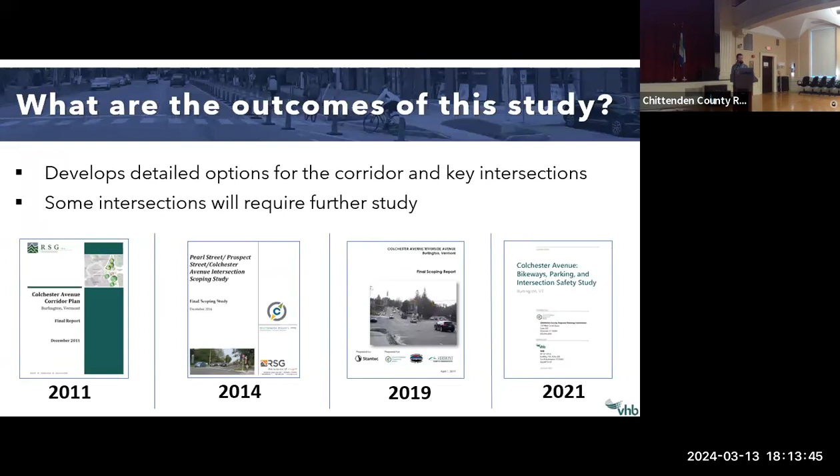So the outcome of this is a finalized document with a recommendation. That finalized document will contain the preferred alternative, which will be planned and designed similar to the degree that you're seeing on the roll plans in the back. These are conceptual in nature. They are intended to eventually inform engineering design, potentially be used to apply for additional funding, what have you.

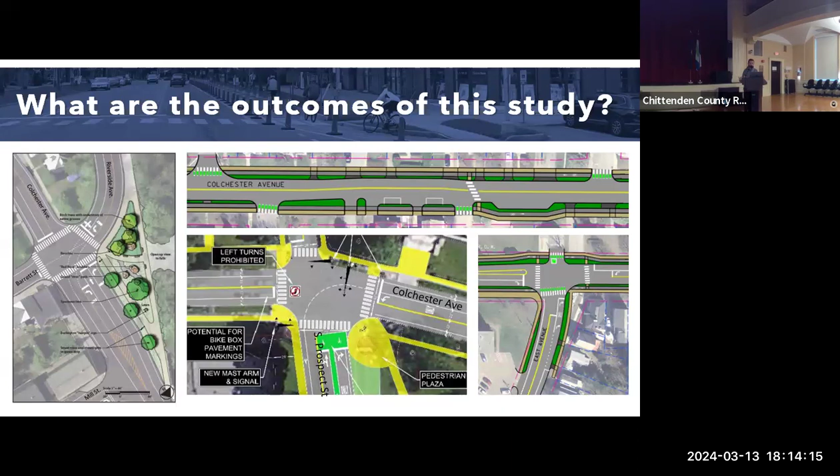So what comes out of this is not only a selected alternative for the corridor of the city, but also a stepping stone into the next phase of the project.

So as a quick reminder, we're looking at Battery Street between Maple Street and Sherman Street, abutting and intersecting College Street, Main Street, Cherry Street, a lot of roadways where we know there's a ton of people movement on foot, on bike, by car, connecting at the south end to Maple Street and the future rail yard enterprise project, and then eventually connecting at Main Street with the new Great Street project, which, as you've seen right outside, is currently under construction, and then traveling north to Battery Park and Sherman Street.

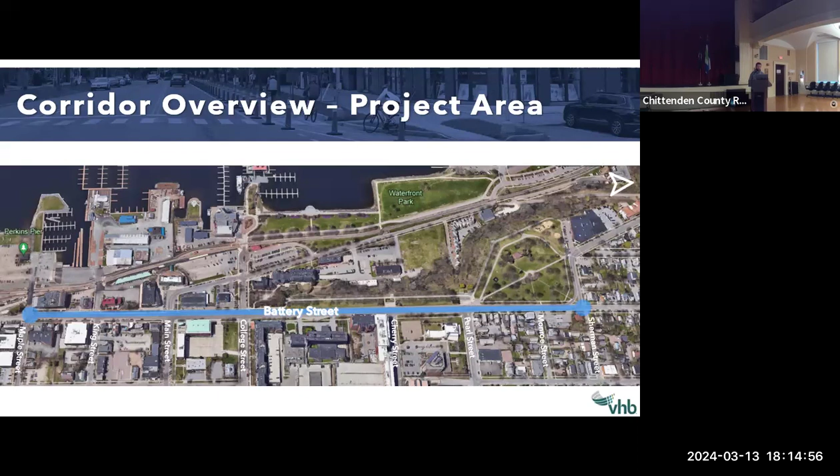So the first time we all engaged was in this room, and that was at our local concerns meeting last spring. From that, we gathered a ton of input about driving along Battery Street, about bicycling along Battery Street, about walking along Battery Street, about traveling across Battery Street between the downtown and the waterfront, about commuting from the north end to the south end in South Burlington, about all manner of things on Battery Street.

And several things kind of were brought forward, and the key takeaways that almost resonated across the board was Battery Street's very uncomfortable. It doesn't feel safe. The crash data that we looked at for motor vehicles would reflect that, and there was definitely consensus that we need corridor safety improvements from the top of Battery Street to the bottom of Battery Street.

Beyond that, we need enhanced pedestrian accommodations. It's almost acts at times like a barrier between the downtown and the waterfront. So better facilitating walking and bicycling connections across Battery Street in addition to along it. Dedicated bicycle facilities - for those that travel Battery Street regularly, you know that there is one single bike lane on one side of the road, and that is in the northernmost couple of blocks. There are otherwise no bicycle facilities on Battery Street to facilitate that active mode of transportation.

We also heard desires for better community connectivity, getting at not just the downtown district connecting to the waterfront district, but neighborhoods in the King Street area connecting to neighborhoods in the north end and vice versa. And then just streetscape improvements - we heard a lot of people like the energy that's around Main Street and the improvements being done there, the improvements previously done along St. Paul Street, and they would like to see that happen along Battery Street as well. Better street ecology, better, more tree planting, more green space, more ways to engage with the street, have it tell a story about the city, about the street itself.

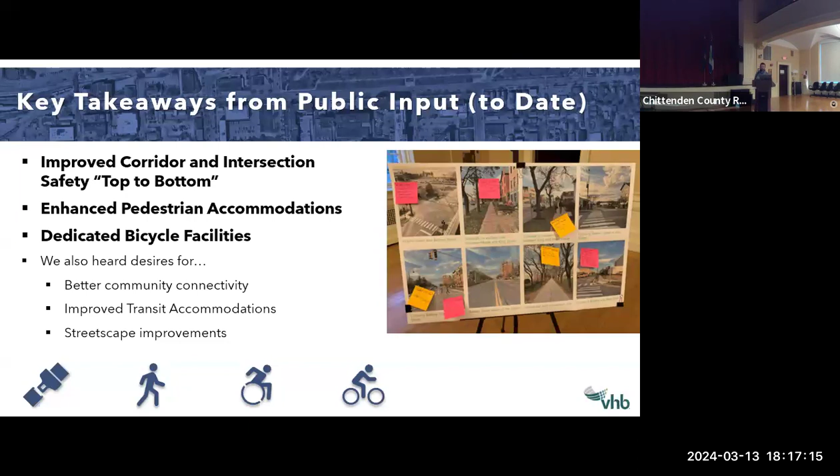We heard all of those, and those were used to better inform and finalize what's called our project purpose and need statement. This is basically our North Star as we develop these options and finalize this study. The project purpose and subsequent project needs are how we check ourselves as we work through this process, asking with every decision made about an alternative or option, does that get to the project purpose and need?

I can read this for those who might not be able to see it: the purpose of the Battery Street scoping study is to identify and prioritize short and long-term improvements that provide equitable, safe, low-stress, and accessible transportation for all along and across Battery Street, regardless of age, ability, or mode of travel.

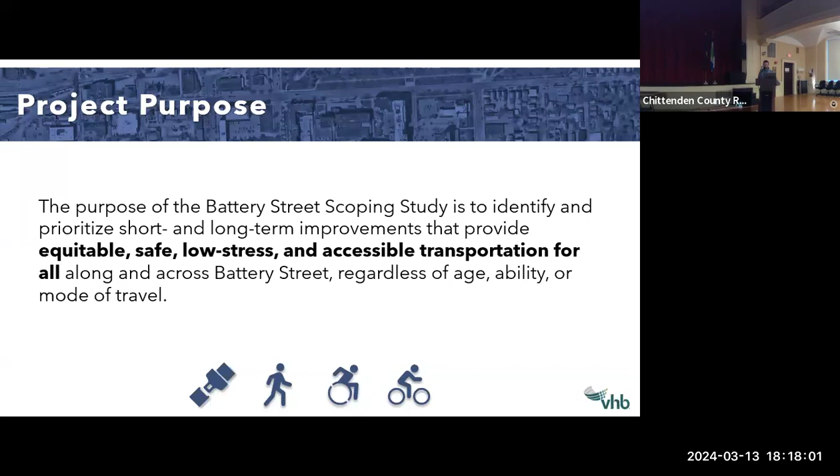Beyond that, we bulleted out several project needs. The need of this project is driven by deficiencies in the current transportation infrastructure and a need for comprehensive corridor planning. These needs are articulated as follows: we need to improve corridor and intersection safety for all users, to enhance comfort and accessibility for pedestrians along Battery Street.

There's a need to provide end-to-end bicycle facilities and critical connections east and west. We need to integrate street ecology into Battery Street's overall design, and we need to provide acceptable mobility for all modes of transportation along Battery Street.

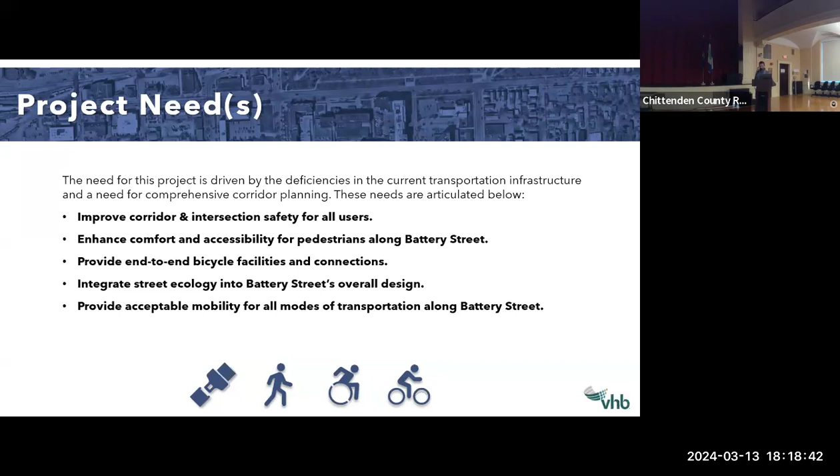With that, I'm going to get into a brief overview of the options. Did everybody get to engage with the roll plans in the back, or did anybody show up just at the start of this already too long presentation? Wonderful. I think with that, I'm going to work through these pretty quickly. If everybody has already seen them, there's not much more I can share, and I'd much rather engage in an open discussion.

So a quick overview of option one. Option one introduces bicycle facilities separated from the roadway, separated from pedestrian travel, and raised up to sidewalk grade on both sides of Battery Street. These are primarily 6 feet wide, though they can vary in some cases to 7 feet wide, particularly in the uphill direction, which is something we'd seek to do if this is the preferred alternative.

There's also a road diet. We are seeking to reduce the number of motor vehicle lanes along Battery Street, particularly in the middle section where there's a 4-lane cross section. We get a lot of feedback that drivers go way too fast, there's confusion about lane configurations at turns onto Main Street and College Street, and it's very intimidating to walk across the street at some locations with the way vehicles come down the hill.

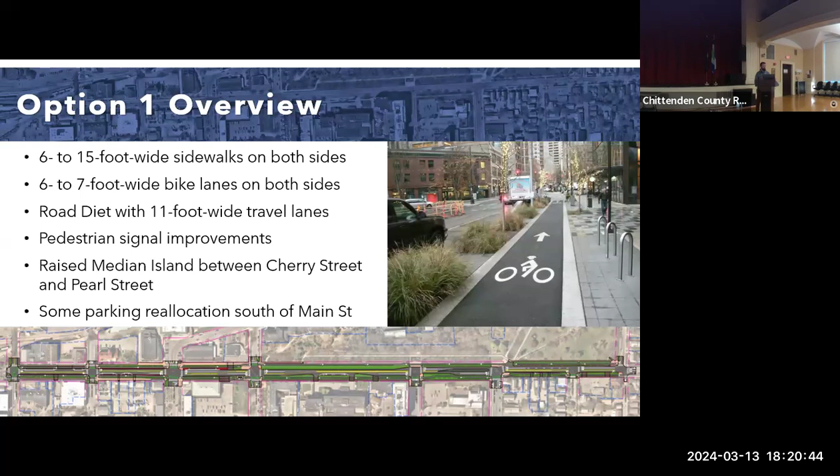So addressing that, trying to calm speeds, we've sought to do that in both options. In alternative one, there's a road diet end to end, so there's a reduction of travel lanes in every block. We've also explored implementation of medians in some form, and in this option I presented a raised and vegetated median between Cherry Street and Pearl Street to further separate cars and add more green space to the corridor. There's also a reallocation of parking south of Main Street, where parking currently exists on both sides of the road; this option would have parking in both blocks, but only on one side of the road.

This is a high-level typical cross-section. It varies block to block. This mostly shows what, for example, the southern two blocks would look like, understanding that as we advance north to intersections like Main Street, College Street, and Cherry Street, there would need to be the introduction of some turn lanes and turn pockets. I can get into that detail a bit more when we look at an overview and side-by-side comparison of both alternatives.

So here's a more zoomed-in look at one segment of option one. It sounds like everybody was able to see these on the back tables, but key differentiators with option one: the biggest differentiator, as Jason touched on, is the significant difference between option one and option two being the bicycle facilities. Option one has separated and elevated bike lanes on both sides of Battery Street, matching the idea under construction on Main Street with one-way bike travel on both sides of the street.

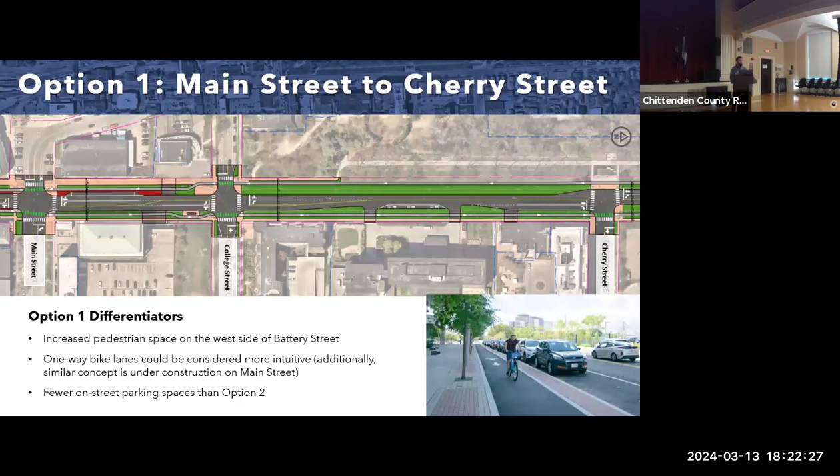There are options to increase the width of the pedestrian space along the west side of Battery Street, and in our case, we are showing fewer parking spaces along the full corridor than option two. However, I want to put a slight asterisk next to that point, noting that parking and other elements of the road between the options are flexible. So just because we're not showing parking from Main to Cherry Street on the east side of the road doesn't mean it doesn't fit—there is actually sufficient width for it to fit, but that's a decision we would make based on the info we get from those here tonight and from our focus group outreach as well.

Option 2 includes, again, the most significant difference being the bicycle facility. Option 2 includes two-way bike travel along the west side, the lake side of Battery Street. An example image of how that looks is on the right side of the screen, with a two-way bike facility separated from the sidewalk and from the roadway with a vegetated buffer.

Option 2 also accommodates the road diet. There is a potential need for an additional turn lane at one intersection, the College Street intersection, because of the right turning volume there and how it would create a potentially unsafe condition for bicyclists if those right turns were allowed to go concurrently with the bicycle movement. That is not something we would allow.

There's a couple ways we can mitigate that, basically separating those movements via signalization, which is how we pursued it in our options tonight. There's also, similar to option 1, pedestrian signal improvements across the board, echoing the feedback we got about crossing Battery Street. Those improvements are implemented in both options. I'll get into more detail in the coming slides. A key differentiator that's flexible between option 2 and 1 is that parking is included in this option all the way up to Cherry Street.

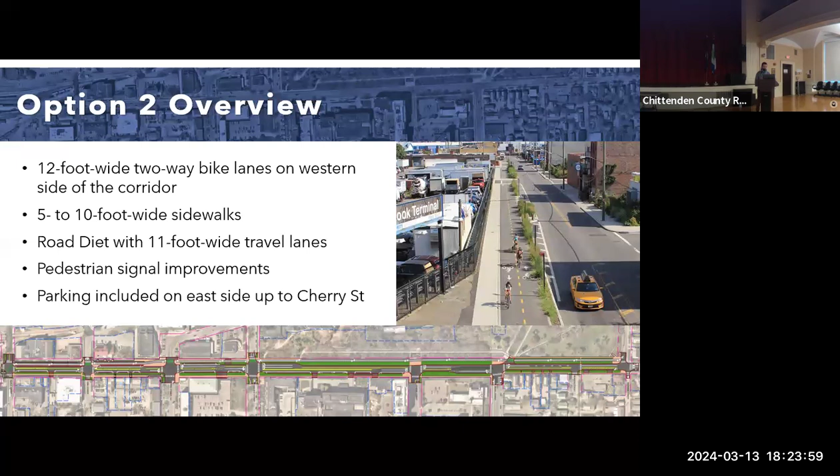Here's another view, rather than looking top down at the corridor - this is what you would see if you were moving up or down Battery Street. You have your travel lanes, your parking, two-way bike lanes on one side of the street, in this case the west side, and then the pedestrian realm on the outermost areas of the block.

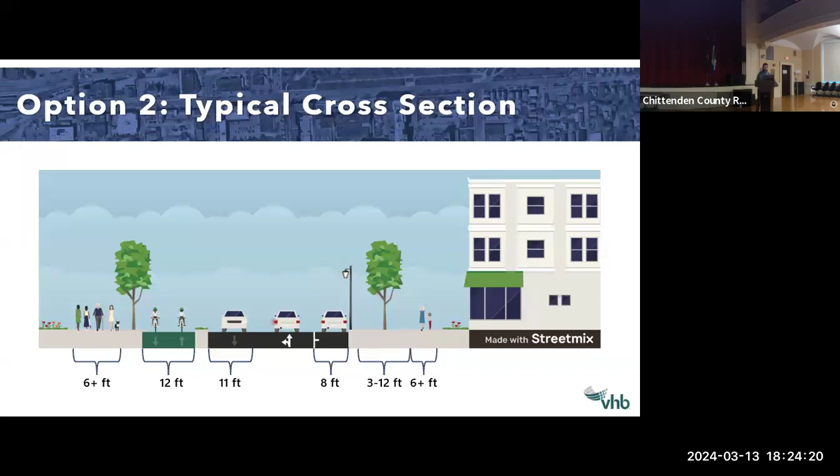Just more of the key differentiators of option 2: the two-way bike facility, and the expanded pedestrian space on the east side where feasible.

So, features of both options: both options employ the road diet. This is us checking ourselves against the purpose and need - that road diet is critical to improving the safety for drivers and subsequently the impact that drivers have on the safety of more vulnerable users along the corridor. Both options have that road diet, that lane reduction in capacity for motor vehicles, and both options have continuous separated bike facilities.

One thing I didn't touch on, more granular, is the Sherman Street intersection. We didn't hear a lot about that tonight, but it's currently configured with what's called a slip lane, also known as a free flow right turn lane. We would seek to modify that intersection, eliminating it to create more comfortable and safer access into and out of Battery Park at that southwest corner of the Battery Street and Sherman intersection.

And both options, because of the road diet and the reallocation of that pavement space, would introduce much more green space.

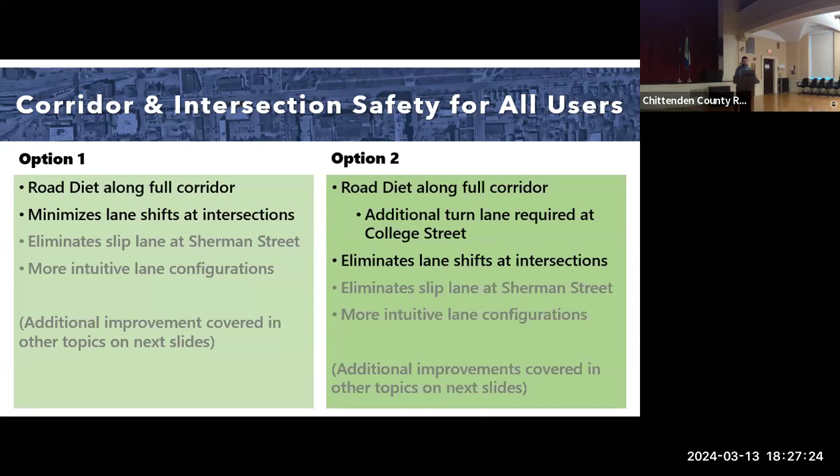Pedestrian safety and accessibility - in both options, we've looked at the phasing of all of the signals. This was a big thing we heard: it's difficult to cross Battery Street, I have to wait too long as a pedestrian, I don't feel safe because the cars come super quickly down the hill. So we've looked at, while pedestrian facilities exist along both sides of Battery Street, and for the most part at every single cross street on both sides, how can we make that better?

One of the things that will feed a more comfortable and safer pedestrian experience is the road diet. But beyond that, what can we do at these intersections to make walkers feel safer? One of the things we sought to do in our traffic analysis was implement a 7-second leading pedestrian interval. This basically gives you, as a crossing pedestrian, 7 seconds of conflict-free crossing time, where you're able to enter the intersection and cross before any vehicular movements start to move concurrently with you.

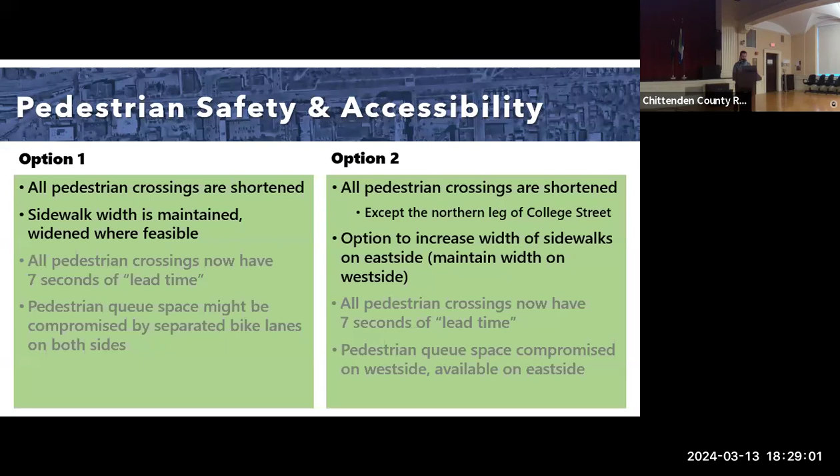Moreover, both options represent, where feasible, an expansion of the sidewalk space. That's a little more difficult in option 2 along the west side of the corridor because of the width of that two-way bicycle facility. But in turn, all crosswalks, because of the road diet, are shortened, combined with that 7-second phase where just pedestrians are in the intersection. We think those would represent two significant gains to pedestrian comfort and safety at our intersections.

Bicycle facilities and connections - you can see every bullet here is bold. This is the most significant difference between the two. As I've gone over, option 1 has one-way separated bike lanes on both sides of the road. Option 2 has two-way separated bike lanes on the west side.

Just thinking through some of the benefits: option 1 is going to match what we'll see on Main Street when it's built. It's slightly more intuitive - bicyclists are moving with the travel of motor vehicles. Option 2, while it might be less common and more unfamiliar, has substantial benefits, particularly north of College Street, where that two-way bicycle facility would travel north-south completely free of conflict with motor vehicles, which are often the biggest threat to traveling bicyclists, whether in the roadway or separated but traveling through an intersection.

Both options are fully separated from the road and pedestrians. Option 2, obviously, you'd be riding side by side counterflow with other bicyclists traveling north-south. That could be less comfortable for people. We've worked on a few projects sharing these paths, but people feel that the speed discrepancy poses a big threat to their safety or just makes them feel less comfortable. That would be a part of option 2 more so than option 1, because you'd be riding side by side with counterflow cyclists.

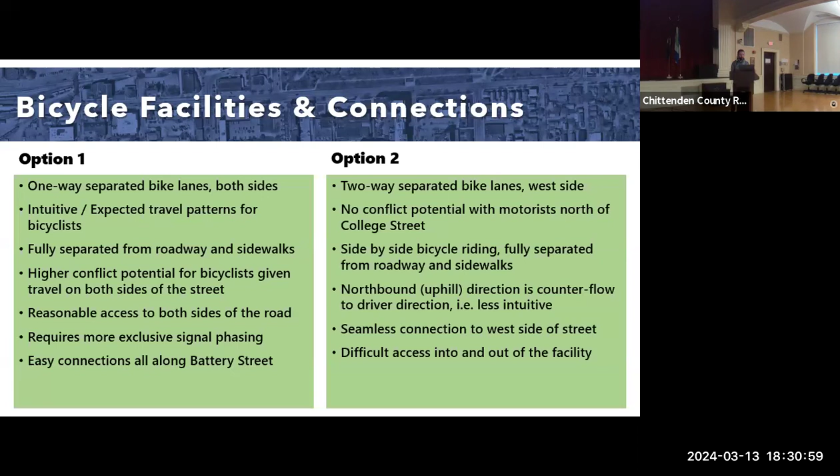Option 1, while there are more conflict points along the east side of the corridor, naturally produces an easier connection to and from downtown because you're already on that side of the street. Vice versa, option 2, while it does have those areas of less conflict with motor vehicles, there would naturally be the need, if you're coming from downtown or the east side, to cross Battery Street to access that bicycle facility to travel with. So there are pros and cons to both bicycle facilities. Both have pretty much the same impact on how the roadway space is allocated.

Street ecology - both options present a significant increase in opportunity for green space, for bioretention, for stormwater management, which subsequently means they both contain a reduction in the total area of impervious surface. Beyond that, option 2, because of the west side impacts, creeps a little more into impacting Battery Park than option 1. And both options maintain existing trees, some more than others - that's always a design detail that would be more sussed out in the engineering phase of the project anyway. But these, again, are high-level scoping level anticipated impacts.

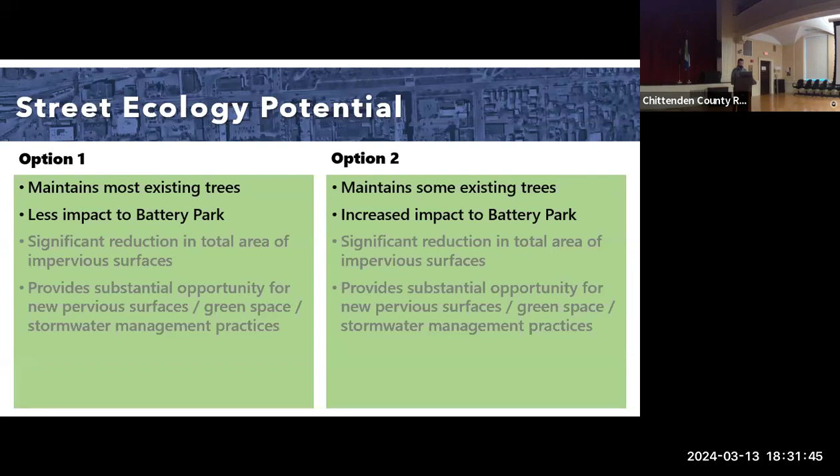Acceptable mobility, excuse me, I'm trying to find the words there, for all modes.

Parking is obviously always a big sticking point with these types of planning efforts. Option 1 removes on-street parking on one side of Battery between Maple and Main. Option 2 removes parking on one side of Battery between Maple and King, so you get both side parking in that King to Main block in option 2. Those two blocks are the most constrained. The flexibility of on-street parking is more so north of Main Street because of how different the right-of-way is down in those southernmost two blocks.

Naturally, with the road diet, there is going to be a change in vehicle flow through the intersection. We are inherently taking away travel lanes and reducing the capacity of the intersection, so we would expect to see an increase in delay if you are driving along Battery Street during the most congested times of the day.

Transit is another topic we heard a lot about at our first meeting. A study like this isn't necessarily going to explore additional transit stops—that's more a conversation had with the transit agency themselves. But what this would do is address the transit stops themselves and the accommodations provided: how does the bus interact with the roadway, how does it pull out to pick up people, how does it engage with the bike facility? Those are all considerations we'd be thinking through here.

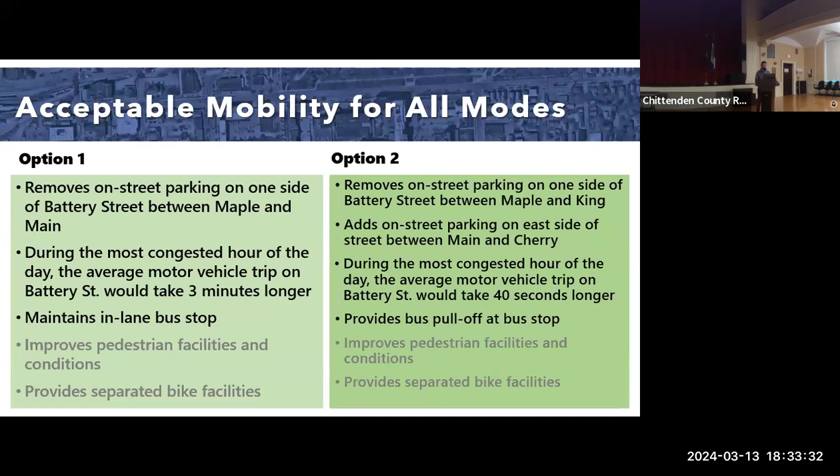And then, obviously, mobility for all modes. Both options contain, for the most part, the same pedestrian improvements, namely at the signalized intersection, and both provide end-to-end separated bike facilities.

Stacking all of those up next to each other, this is no-build, option 1, option 2, side by side. It appeared to us in our analysis that option 2 gets a little bit more at two of the needs than option 1, but option 1, we think, still accomplishes and accommodates all of the previously identified needs.

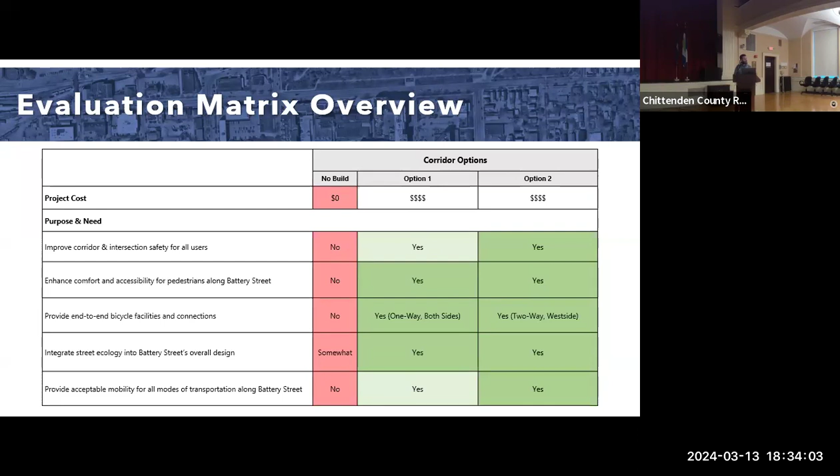For those curious what's happening the rest of the way with this study, after tonight's meeting we will re-engage with our advisory committee, a group made up of stakeholders along the corridor: the city, the Parks Department, the transit agency GMT, CEDO, folks from other agencies and offices in the city. Local Motion is also on our advisory committee.

From there, we would seek to select and refine the preferred option. The goal, the critical path item, is choosing which of these options we are going to move forward, refine, and develop into a full scoping report.

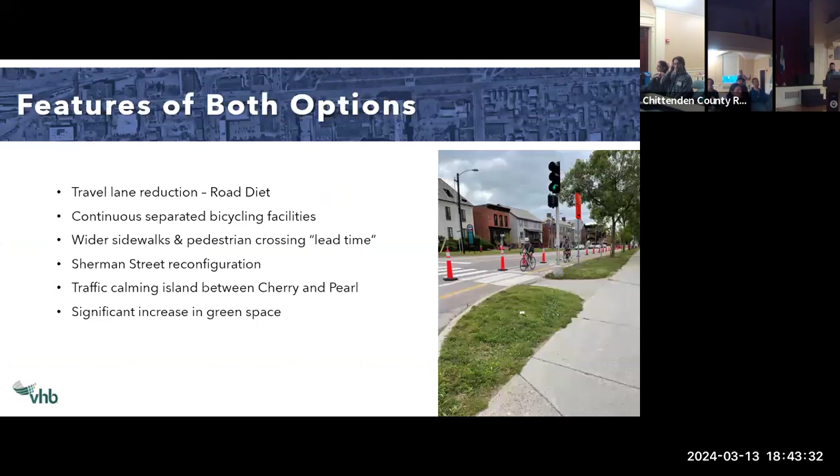Did you mention the cycling tracks would be at sidewalk level? If they're separated from the road, are there parts where they might go side by side with the sidewalk, or is there grade separation unless completely buffered? They would be at sidewalk grade but separated from pedestrian traffic pretty substantially. So there's no spot where the sidewalk goes right up against the bike lane? No, that's something we always seek to avoid, because you want to maintain separation of modes. We didn't include a width in this cross section, but it would never be less than 3 feet, and for the most part at least 6.

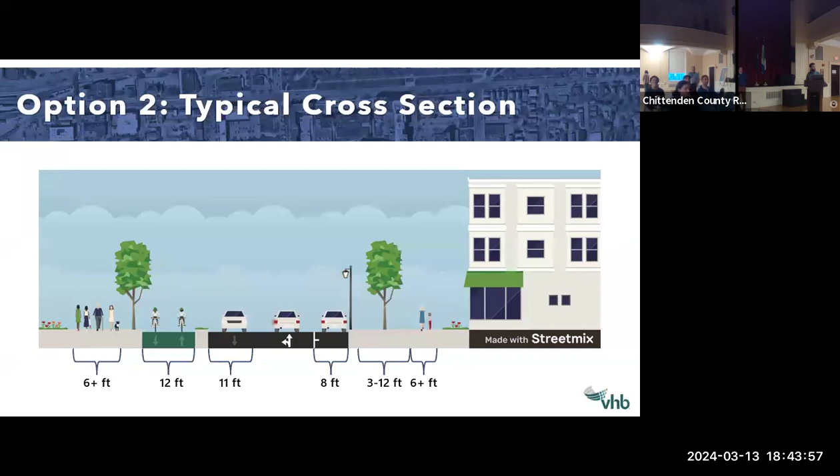Same question in option 2. I don't know if we get much more zoomed in than this.

There might be some localized areas, to Jason's point. For example, the building April Cornell's is in, Burlington Bay, there is, if we maintain or add on-street parking to mitigate reallocation of space currently used for parking in front of this building, some areas of localized side-by-side travel. However, in engineering design, if the two-way bike lane there is 12 feet wide but there's a lot of pedestrian traffic, particularly in and out of those buildings, we might consider a slightly narrower bike facility to introduce space that would buffer them from walkers.

Yes. Well, the building I live in is full of elderly people, and they consider it Barrier Street. That's one thing, but the trucks are gigantic now, I guess that happened a decade or two ago. Pickup trucks, but there's 70-foot trucks, and a lane, whatever they need for a lane should be how wide it is, because they're going to be there.

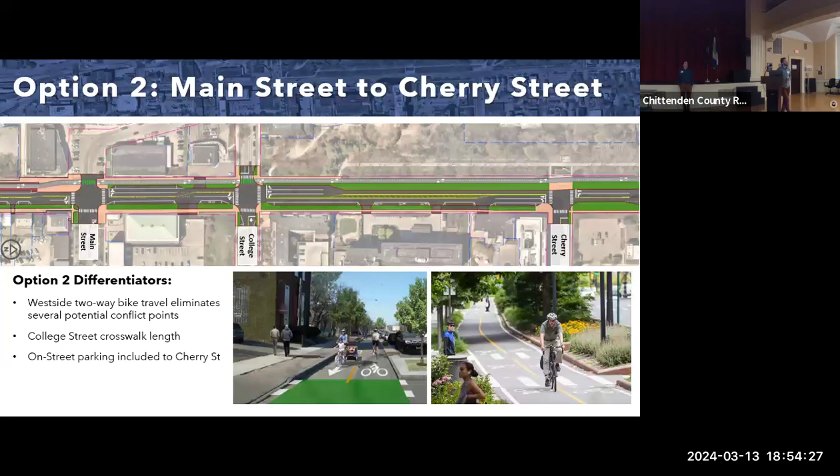Are you talking about the bus stop right here, just south of College Street? There was one where there was a pull out. I think option 2 had a pull out and option 1 did not. I just like that sort of comparison.

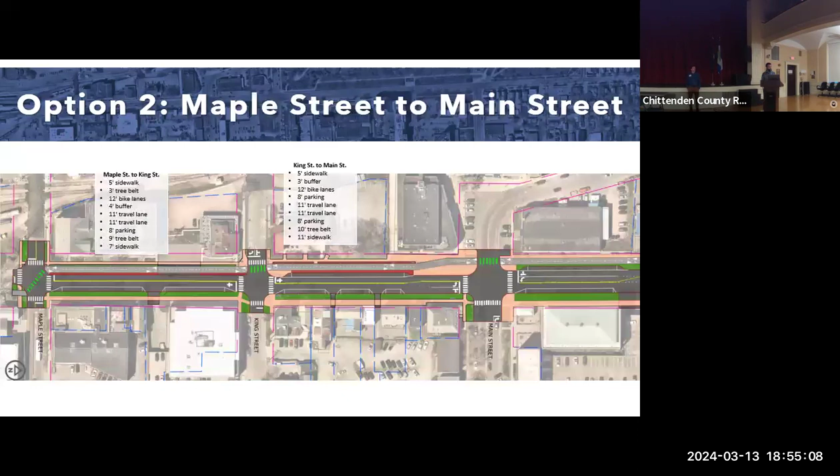Explain a bit, one versus the other. I think this is one of those elements that's somewhat flexible, and it would kind of be up to coordination with the transit agency. In option 1, the bus would stop in the lane, and in option 2, the bus pulls out. There's trade-offs for each. Where the bus pulls out, it's more difficult to get back into the flow of traffic, but it benefits motor vehicles because they can pass through freely and not worry about the bus getting back in.

An in-lane stop allows for better transit operating times, I think, more than anything. The bad behavior we see with that is oftentimes cars try to bypass the bus.

It'd be nice if we could just have it all.

That would be more a detailed question that would be sussed out. For Main Street, we have the bus pullouts because that's where we landed with that project, so we have improved shelters and accommodations at the stops, but the buses pull out of the vehicle travel lane. It might encourage better bus headways if you weren't pulling out and navigating back in.

I don't recall if I repeated that question, but for the recording: question 1 was, will the revision at Sherman Street to that slip lane negatively impact traffic operations? The answer was ultimately no. Question 2 was, can you describe in more detail the bus stop in the northbound direction south of College Street?